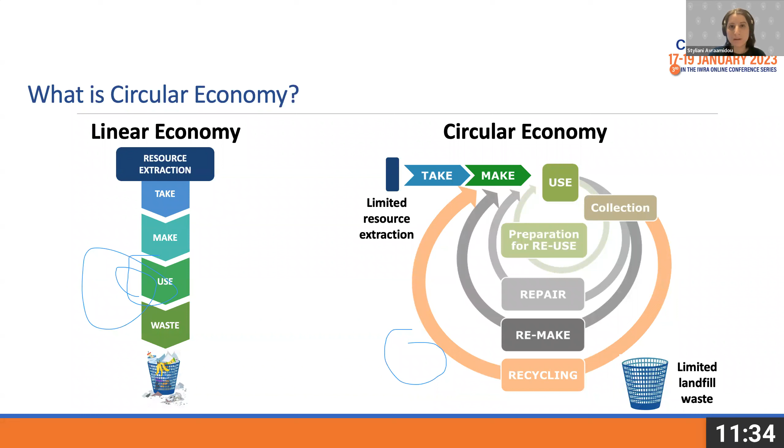So how do we define circular economy? Many people and many organizations have defined it. This paper from 2017 analyzed 114 different definitions of circular economy, which is supposed to be this well-defined thing that we know the meaning of and how to implement, but the reality is that we don't have a consensus of what it actually is.

Looking at all these definitions, we can identify 5 main key points: reduce material losses, reduce the use of natural resources, increase the use of renewable resources and energy, reduce our emissions, and increase the value and durability of products.

This concept of circular economy has been promoted throughout the world. Many businesses, organizations, and governments are promoting this concept. And the reason why this is in everyone's language is next slide.

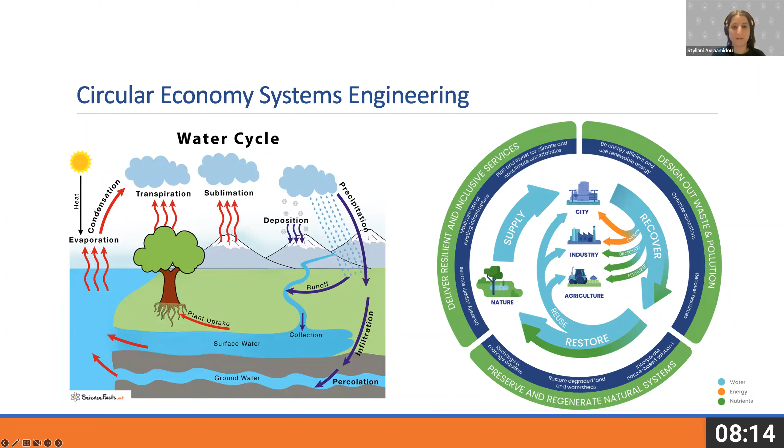These studies looking at the energy-water nexus are very important, and a systems analysis is very important when considering decision-making for circular economy water supply chains.

So I will briefly introduce you to a framework that we have been working on in my group, looking at how to systematically consider these huge supply chains. We had been looking mainly at food supply chains, so I will use again this coffee example to go through the framework, and we have been using mathematical modeling and optimization to achieve our systems analysis. I will go over each of these steps.

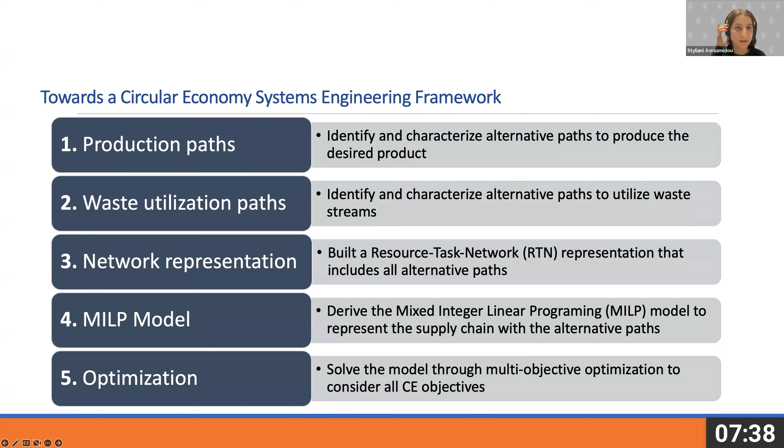Okay, so the first step is to consider all the alternative production pathways for our main product. In the case of coffee, we have two main production pathways, the wet method and the dry method. I won't go into too much detail, but the wet method uses a lot of energy and water, versus the dry method needing a lot of time and space. So we already have some trade-offs there.

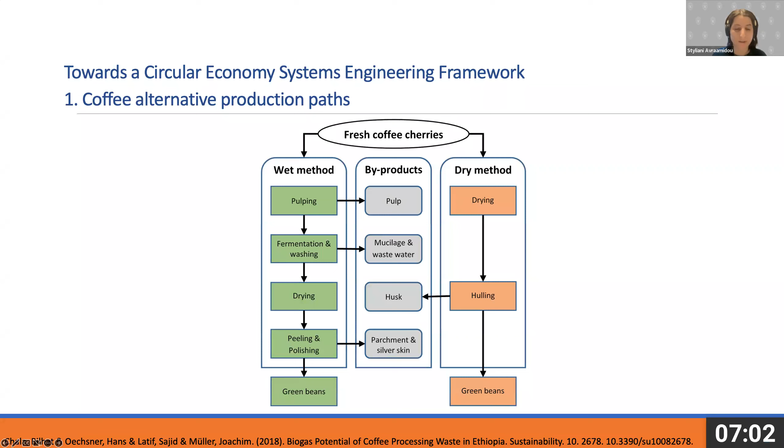So the next step is to collect all the different waste happening in our supply chain and figure out different ways to utilize those wastes. For the organic waste from our coffee supply chain, we can use them for many different products and processes. For this case study, we just focused on the energy producing utilization pathways.

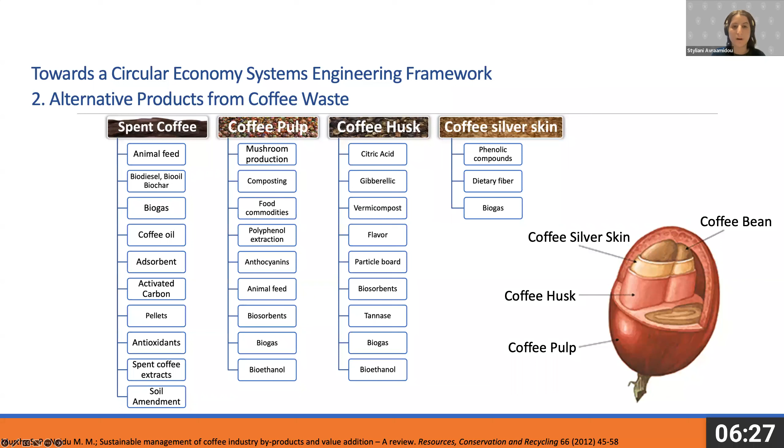So we identified those energy producing pathways. We did some research and found data and parameters for producing biodiesel, bioethanol, biogas, and all the energy products from our coffee waste streams. Based on this experimental data from all these papers, we were able to create models for each of the processes that I have here.

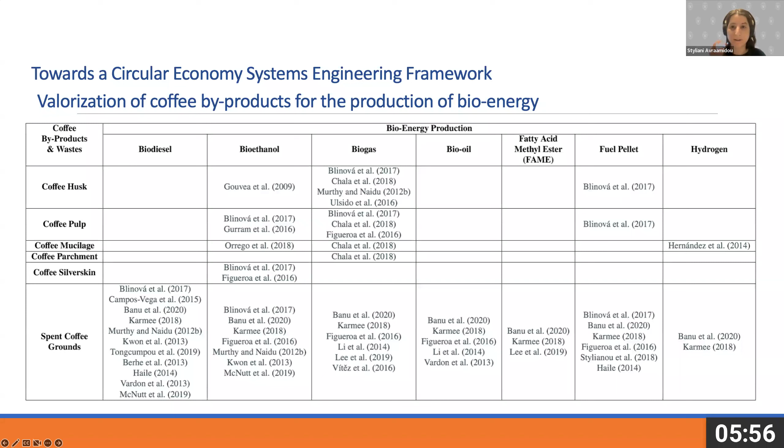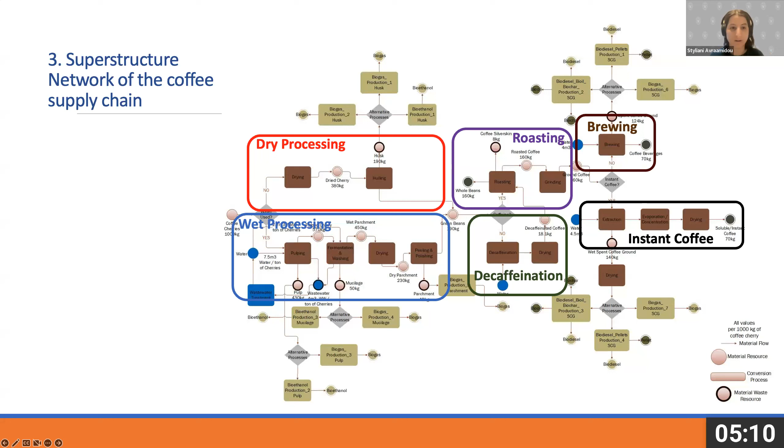Okay, so based on all this data that we collected about the production processing pathways and the alternative pathways to reuse waste and produce energy, we developed this diagram. This is called an RTN network, where each of the boxes is another process, each of the circles is a resource, the brown boxes are the main processing pathways, the greenish boxes are the waste processing pathways, and then we have a blue box for the water recycling that we need in the wet processing, as an alternative option if we want to reduce the water needed.

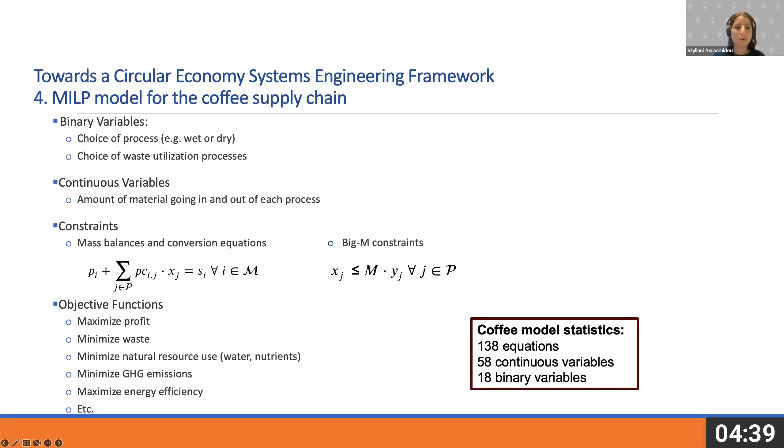Okay, so based on this network, we were able to develop a mathematical optimization problem, and that's what we are known for, creating these big models, where we had different types of variables describing what's happening in the network. We had constraints, and different objective functions. So we use this model to maximize our profit, minimize the waste, minimize our natural resources, looking at water or nutrients, minimize our greenhouse gas emissions, and maximize the energy output of our whole system.

So this is kind of the results that we get from this type of analysis. These are called the Pareto fronts, where we can see different solutions for our entire supply chain.

Here we had 5 different demand scenarios based on what type of coffee we want our system to be producing. We had whole beans, coffee beverages, and instant coffee. We saw that instant coffee was the worst. You can see scenario 4, which is only producing instant coffee, is utilizing the biggest amount of both water and coffee cherries. And then the size of the bubble is the CO2 emissions, so we see that scenario is also the worst. But this kind of analysis can give us different solutions, different options, and help us accelerate that transition towards circular economy.

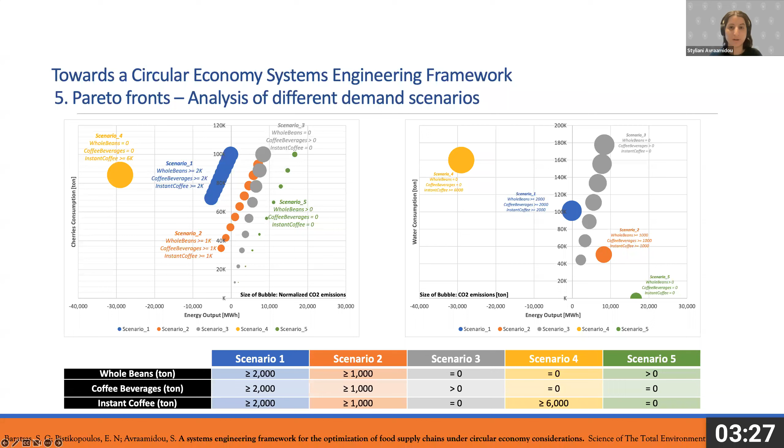Okay, so another thing is how do we navigate between all those points that I showed in the plot, like which one is more circular? And what we try to do is come up with some assessment metric to measure this circularity.

So we're thinking, do we just implement environmental goals? Do we just consider economic, social? How do we put all of this together into a single objective function? So what we came up with is to use those 5 characteristics that we identified for circular economy and come up with a score for each of those 5 categories.

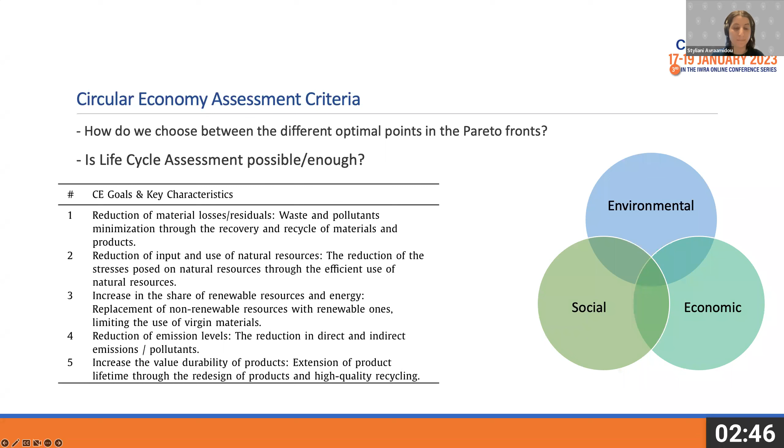So that's Micron, our circular economy assessment framework. This is for now focused on companies at the micro level. So we divided this into different economic sectors. We identify those principal categories from the key characteristics of circular economy, and we were able to use GRI-based metrics to come up with a metric on how well a company is doing in terms of water, energy, emissions, waste, and durability of their products.

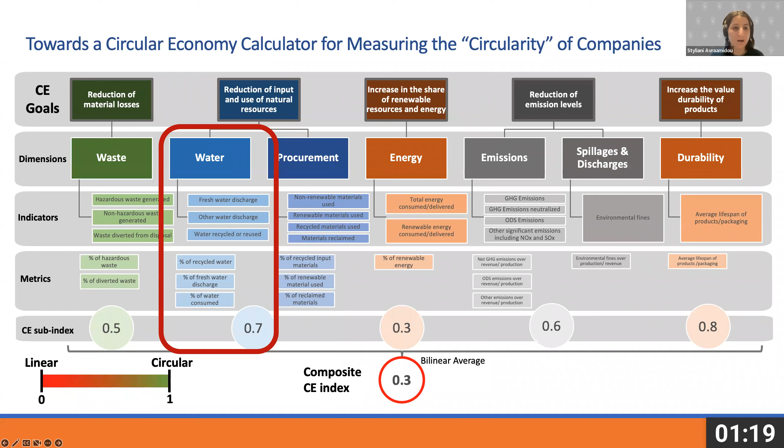So that's a bit more into what's going on in our Micron calculator. We have the 5 circular economy goals. For each one of those 5 goals, we have a dimension, and you see that we clearly have one specific dimension for water, because we really think that's something important in terms of circular economies in general, not just food circular economies. And then we have indicators, metrics, and we give a score from 0 to 1 for each of those goals, and then we average those to get a composite circular economy index. If you're closer to 0, you're linear. If you're at 1, you're ideally circular.

And that's just a summary. What we use this metric for is for companies to be able to track their transition towards circular economy, so it can be a temporal tool. We can identify which areas really need improvement, and we can compare companies at the same sector with other companies at the same sector.

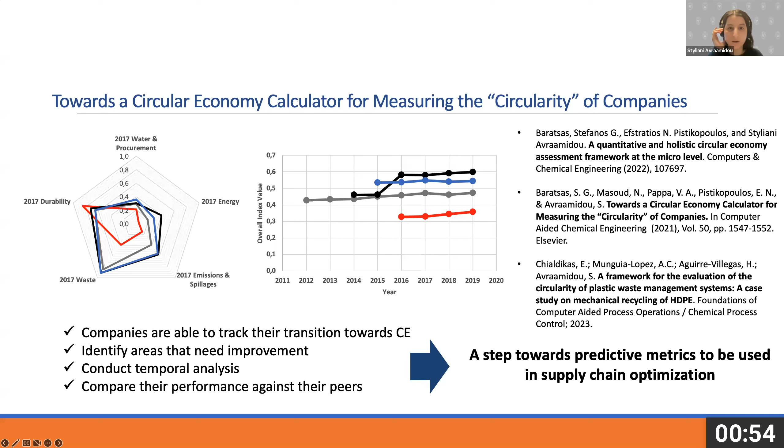Next slide. Okay, just to summarize everything, I presented a framework for the modeling and optimization of circular economy supply chains, and I also introduced a circular economy assessment tool. I think systems analysis can aid in the understanding, analysis, and optimization of more general circular economy supply chains and help us converge all these different disciplines towards our common vision of circular economy.

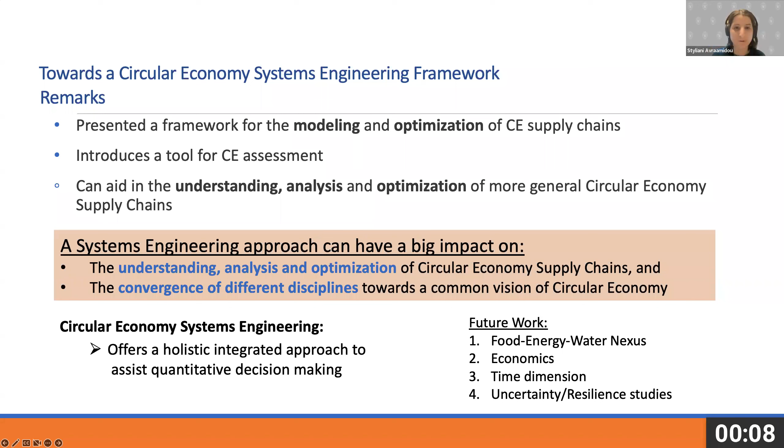Future work will be to consider more of these food, energy, water nexus interactions, looking at more of the economics, the time dimensions, and the uncertainty that comes into the supply chain. I'm sure that many of the speakers will be able to tell us more about these water supply chains in a bit. Next slide.

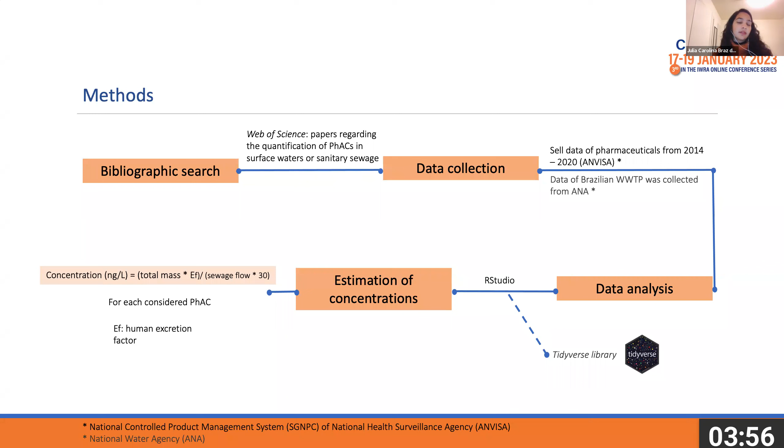So I did the estimation considering the total mass of active compounds sold, the human excretion factor of each of the active compounds, the sewage flow expected for the municipalities I'm working in, and a conversion factor.

So I noted that in Brazil, the active compounds in sanitary sewage are mostly reported in São Paulo state, in those cities, Minas Gerais state, Rio Grande do Sul, and Ceará state. And it makes sense because especially São Paulo state and Minas Gerais state are the most populated states from the country.

The most investigated therapeutic classes are antibiotics and psychiatric drugs, and also the data collected from the national agency focuses on these kinds of therapeutic classes.

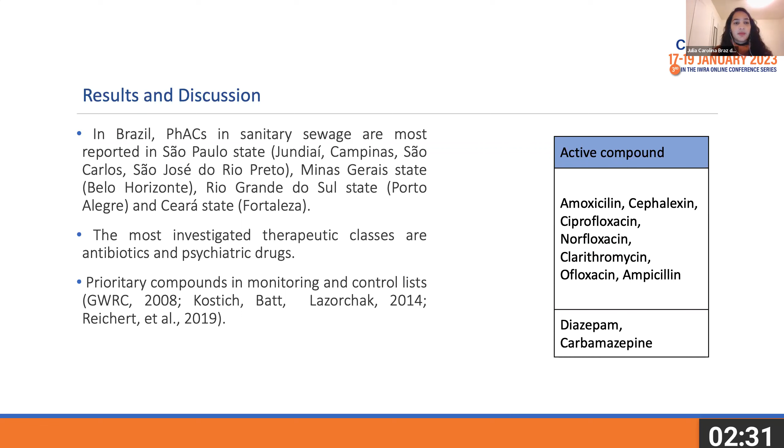So in this first data exploration, I noted that amoxicillin and azithromycin, both antibiotics, are the most recurrent in the registers.

And on the basis of the sold quantity—units quantity, it may be a box with many pills, or it may be a bottle with a certain value of liquid active compound—amoxicillin and azithromycin are still the most sold, but we can see that amoxicillin has a human excretion factor of 60%, while azithromycin has about 10%.

And we have the other active compounds like diazepam and carbamazepine.

So here I brought just amoxicillin and azithromycin because they are the most sold based on quantity of units sold. And as you can see yearly,

both of them have the highest concentrations compared to the other active compounds. Amoxicillin is about more than 75,000 nanograms per liter, based on my calculations, and it makes sense because it is one of the most sold, and it has also the highest value of human excretion factor.

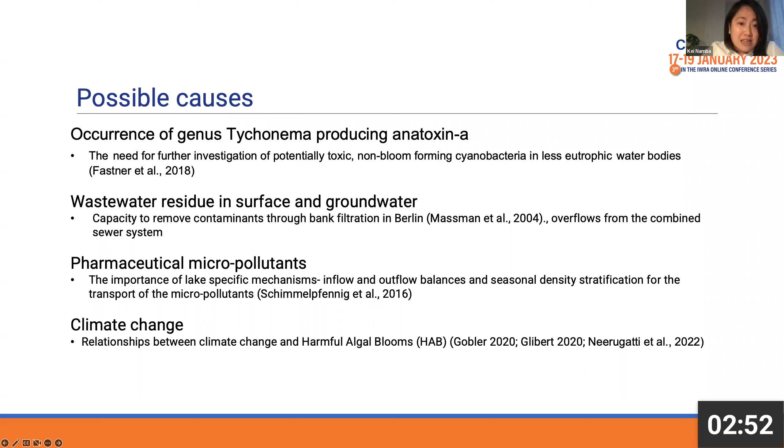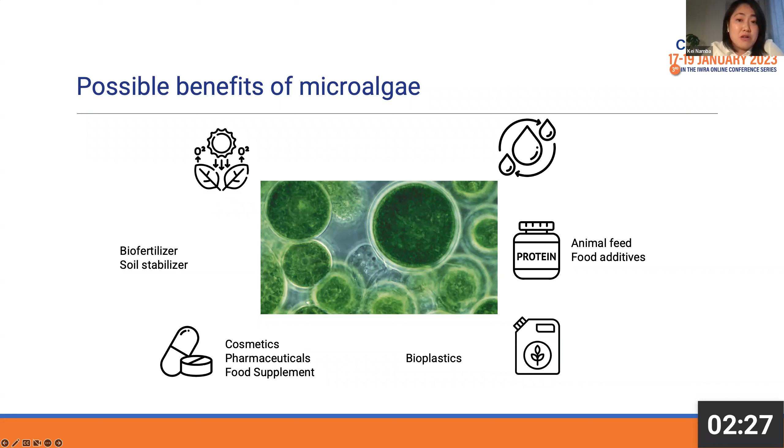However, if treated properly, cyanobacteria or microalgae can be used for many good purposes: they reduce carbon dioxide, phosphorus, and nitrogen in freshwater ecosystems, and promote biodiversity. They can be used as a sustainable source of nutrients and food additives, or as biofertilizer, soil stabilizer, bioplastics, or biofuel.

For the solution, we will remove the toxin and treat it in the most energy efficient way, and investigate what kind of materials we can extract as a result of the treatment. We want to sell this solution as a service. Here are the potential materials we can get as byproducts. Through our lab process, we produce resources out of these algae and cyanobacteria, and it also captures CO2, and the water will be reused over and over again.

And can you go back to the previous slide?

The further byproduct of toxin removal, biofertilizer, is especially attractive because there's a global shortage of phosphorus, and producing fertilizer locally is urgent to build a self-reliant system. There's a demand for shifting to locally produced fertilizer.

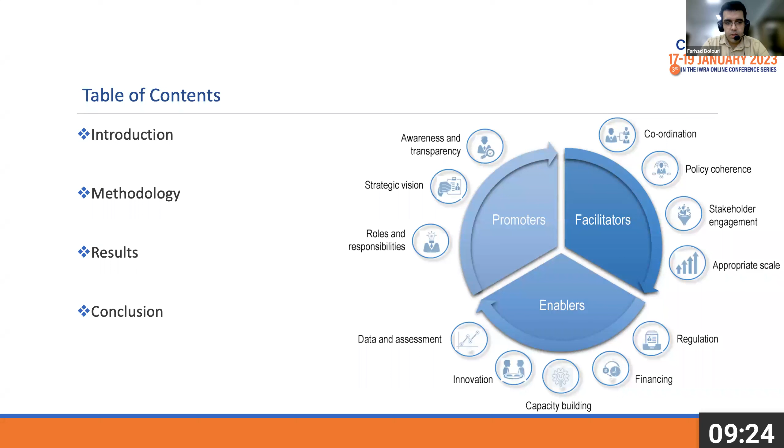Next slide, please. As you see in the table of contents, we have introduction, methodology, our results and discussion, and conclusion.

As introduction, as you know, emerging pollutants are chemical compounds identified as dangerous to the environment, and consequently to human health. Presently, they have been labeled emerging because of the rising level of concern linked to them.

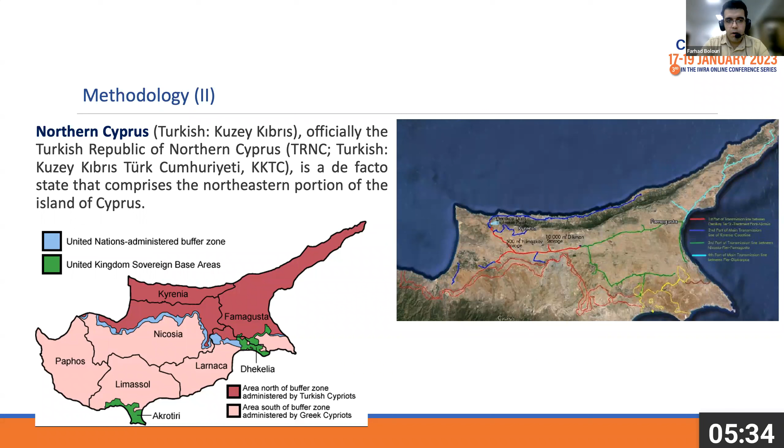Our case study is North Cyprus — in Turkish, Kuzey Kıbrıs. Officially, it is the Turkish Republic of North Cyprus, TRNC. In the photo, you see Cyprus is in two parts, north and south, with a region that is the United Nations buffer zone. Next slide, please.

Yes, up here I want to show the results. For example, the United States has USGS. They defined what is the emerging concern, emerging pollutants, and they said it is important to take the data. The most important part of this research and solution is data. I read from their report.

They said emerging contaminants or contaminants of emerging concern can refer to many different kinds of chemicals, including medicine, personal care, or household cleaning products, lawn care, and agriculture products, among others. These chemicals make it into our nation's lakes and rivers and have a detrimental effect on fish and other aquatic species. It is also not good for human health, as you know.

So you see, they don't have any special solution for it. But in the first step, they said the data is very important to gain. Because this issue is very new for all societies, they highlighted getting and gaining more data for this problem. Next slide, please.

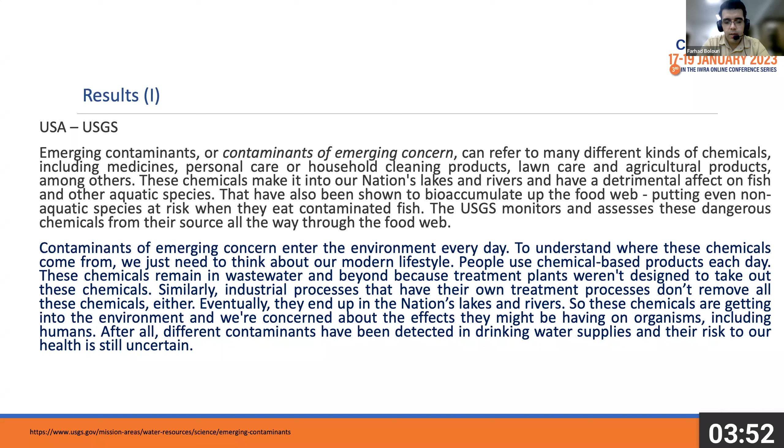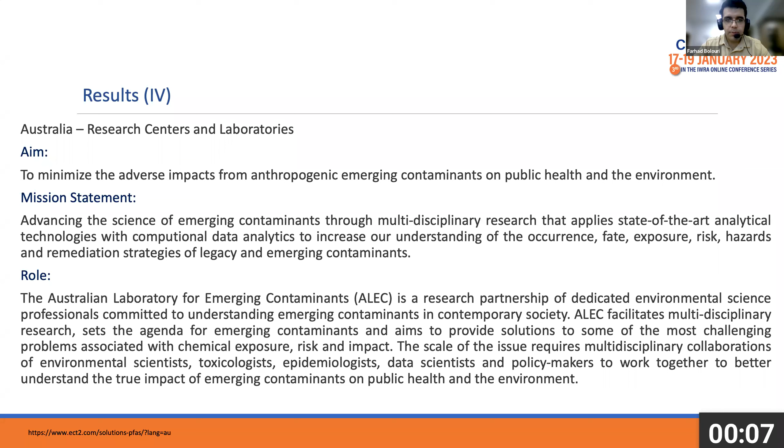Next slide, please. Yes, according to these countries that we mentioned, and according to a review of the management status of developed countries regarding emerging pollutants, it can be concluded that due to the status of identifying these pollutants and the importance of valuable data on these items to make decisions about how to manage them, it is essential to address this issue in Cyprus as well.

And to collect emerging pollutants data in the entire region carefully for consecutive years. Even data exchange with the south part of Cyprus can be proposed, to collect data for all of Cyprus as a whole, so that all correct management decisions are applied. Also, according to the circular economy approach, it is very important that during the decision-making process for the management of emerging pollutants, the nature of circular economy is also considered.

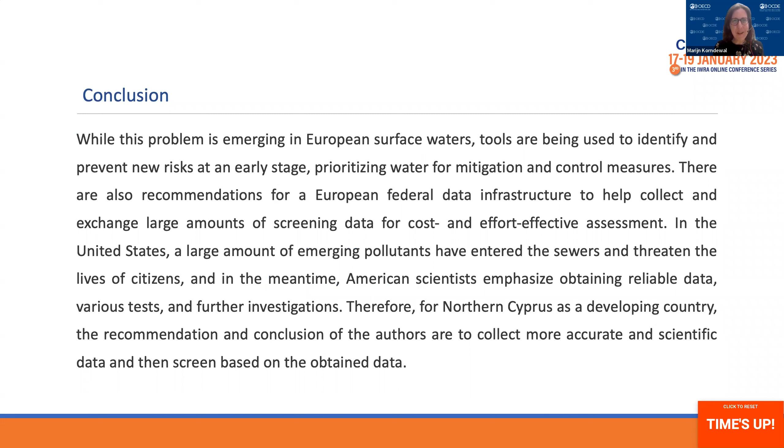For example, emerging pollutants are used in the manufacture of related products in order to cause less damage to the environment, exactly what is done in the case of car batteries, some computer parts, etc. Next slide please. Yes -- Farhad, sorry, I'm afraid I'll have to interrupt because your time is up. Can you do your conclusion in one sentence? Okay, the conclusion is the same, thank you, our last slide. Okay, so next slide, please.

Thank you so much for your attention.

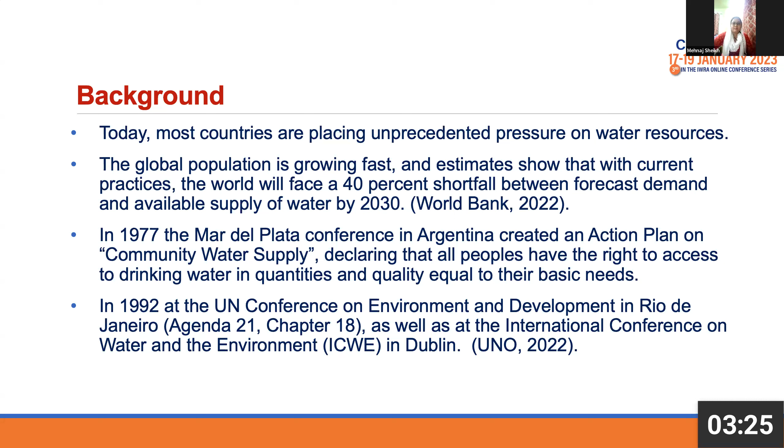Many national and international organizations are working towards these water-related issues. The UNO's Sustainable Development Goals also address the issue of water.

Indian cities are also facing many major water crises, like the supply of water and the quality of water. Since India is the second most populous country in the world, demand is increasing, and unsustainable use has degraded its quality. So in the same line, we have chosen...

We have chosen Jaipur, the capital city of Rajasthan, as the study area where we can study the demand of water and its impact on the health of Jaipur. Rajasthan is a water deficit zone, and so is Jaipur. Being an urbanized city, the population is increasing rapidly, along with manufacturing industries, which have all increased the demand on water, and its supply and quality are degrading day by day.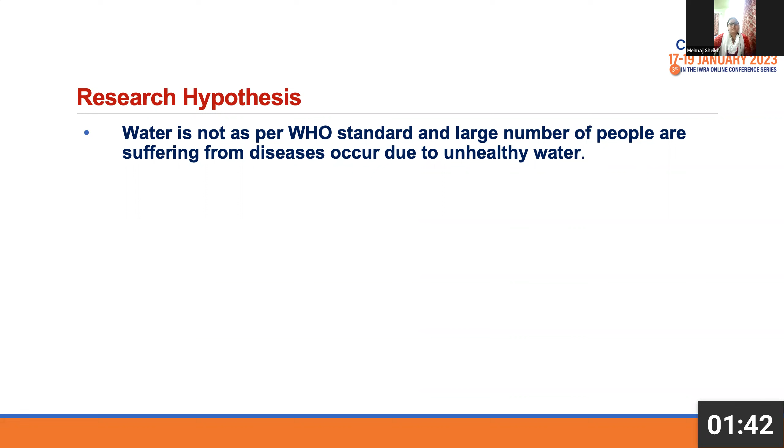The research hypothesis is whether the water is not as per WHO standards, and due to this, people are suffering diseases due to unhealthy water.

The methodology adopted here includes personal observations and field surveys. We have also collected data from government reports, like from the Public Work Department and municipal corporations. So the data reveals that...

The sample study shows that Jaipur receives nearly 65% contaminated water, which is high in concentration of TDS, and contaminated by bacteria.

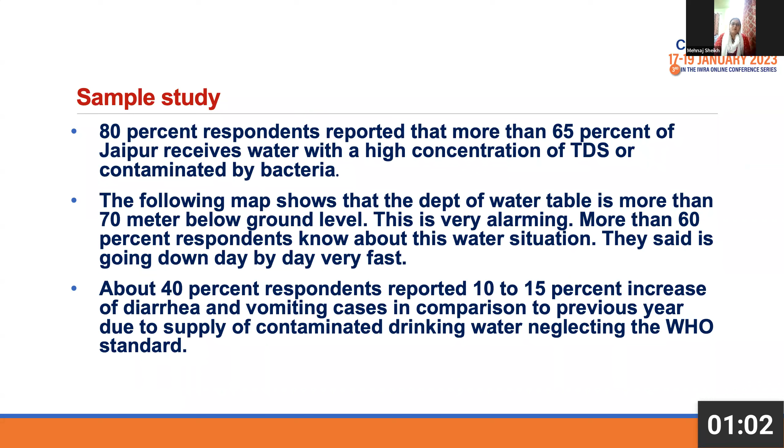This map shows that the water table or groundwater table is rapidly going down, and it is below 70 meters below the ground level.

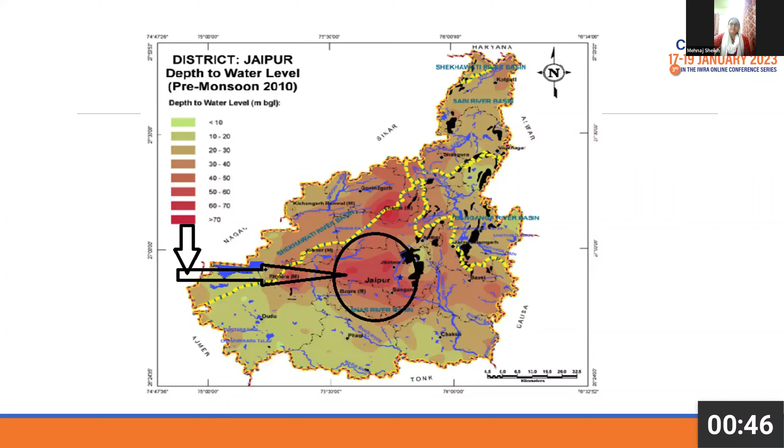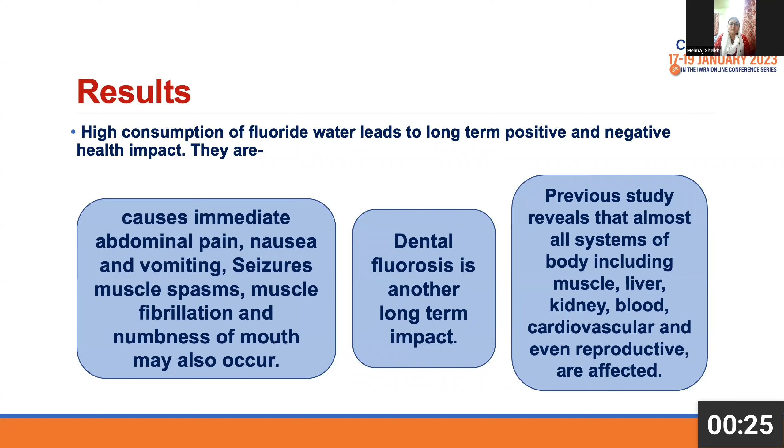The results show that some zones and areas of Jaipur are consuming high water that is rich in fluoride. This has led to many negative impacts on health, like abdominal pain, nausea and vomiting, dental fluorosis, and it has affected almost all body parts of humans.

The next contaminant is nitrate. Due to excess use of nitrogenous fertilizer and organic waste, the nitrate concentration in water is increasing, which has led to very unsafe conditions in infants like blue baby syndrome. This has also led to increased colon cancer and many respiratory diseases.

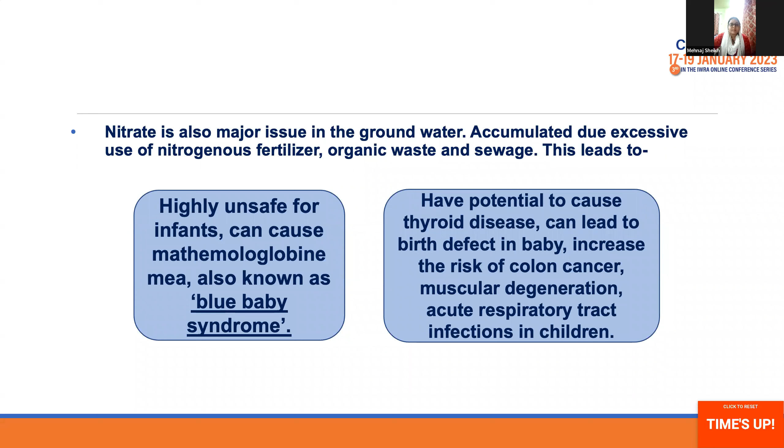So we can conclude that to tackle all these problems, it is demanding that proper rainwater harvesting systems and groundwater recharge systems should be enforced effectively. Ensuring safe and regular water as per WHO standards is also mandatory.

Policy implications: as a last point, I would like to conclude that some steps must be taken in order to save the environment. Effective steps must be taken, and this should rely on public participation and should be dependent on us.

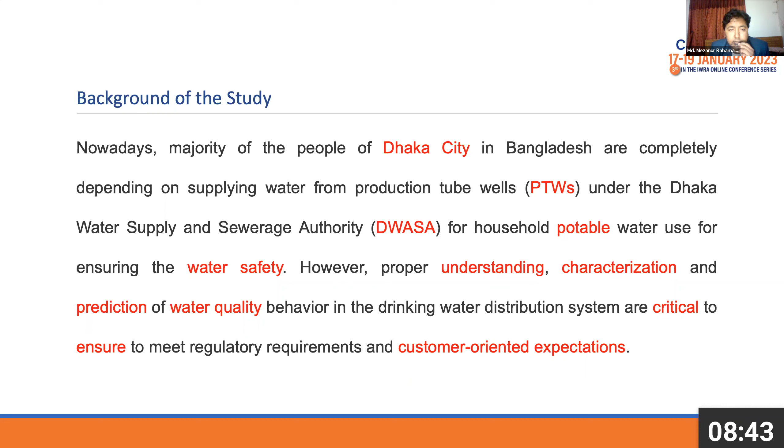The main objective of my study is to assess the effectiveness of the current chlorination system in the water distribution system of Dhaka city, and then prediction of the concentration of residual chlorine over space and time. The residual chlorine is an important disinfectant to make water safe before drinking. Also included is the calibration and validation of the hydraulic model using time pattern.

This was done through the EPANET software. EPANET is an Environmental Protection Agency tool, a software for hydraulic and water quality modeling, and also for determination of sensitivity of the residual chlorine model.

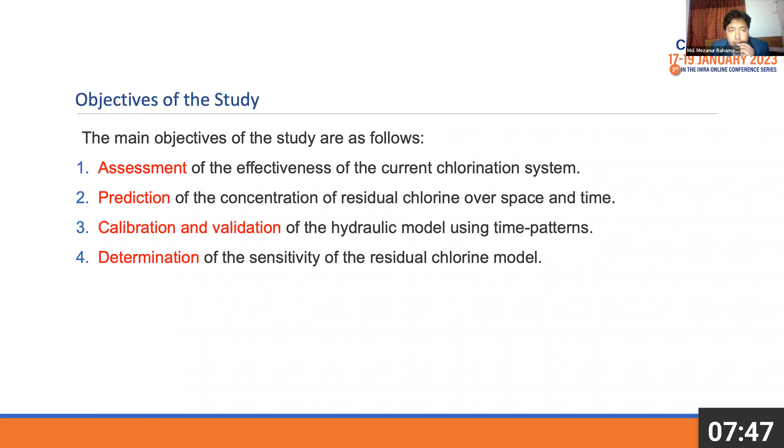The main issues and problems of the study area are that there are 100 DMAs, meaning district metered areas, to improve the water supply network of Dhaka city. Though there is a protocol for chlorination at the pump or pump station of production tube wells, monitoring of residual chlorine is found absent in reality. Chlorine is administered rather arbitrarily, and its effectiveness in the water distribution system remains largely unknown. The concentration of residual chlorine within a water distribution network varies in accordance with variation both in location and time.

The methodology of the study: first, I had to select a DMA, district metered area, which is an existing hydraulic distribution network. I set this up through the GIS database and EPANET.

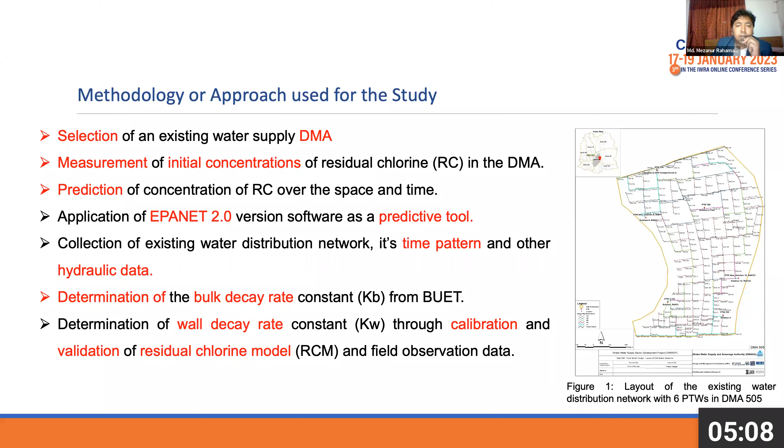The average value of KB, the bulk decay rate, was found to be negative 0.2975 per hour, and the value of the wall decay rate was 0.0065 feet per second. We calibrated at 2 points, comparing predicted and observed time series values of residual chlorine for node 172, and found that KB of 0.2975 and KW of 0.0065 fit well with the observed residual chlorine data. So we took KB equal to 0.2975 and KW equal to 0.0065 feet per second.

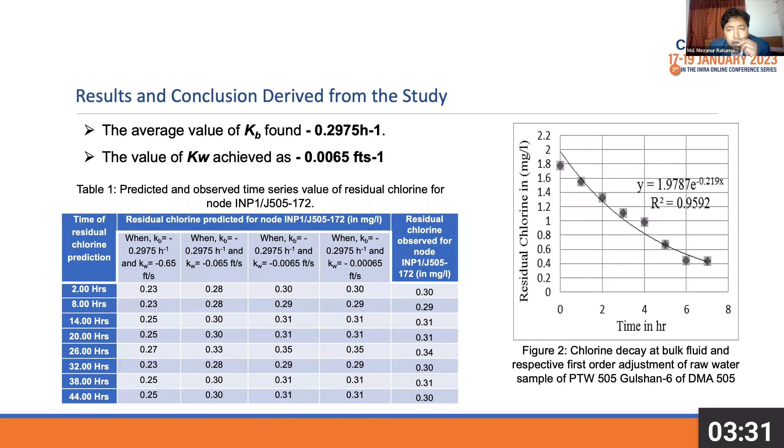Then accordingly, we simulated the model and matched it with the observed residual chlorine data, and finally we got some results.

From the study, we found that the value of KB is significantly higher than the literature value due to high temperature and high organic content. The KW was nearly similar to literature data. We also found that more than 50% of pipes had zero residual chlorine at baseline condition, but when we improved the injection of residual chlorine, the coverage in the network showed better results than the baseline.

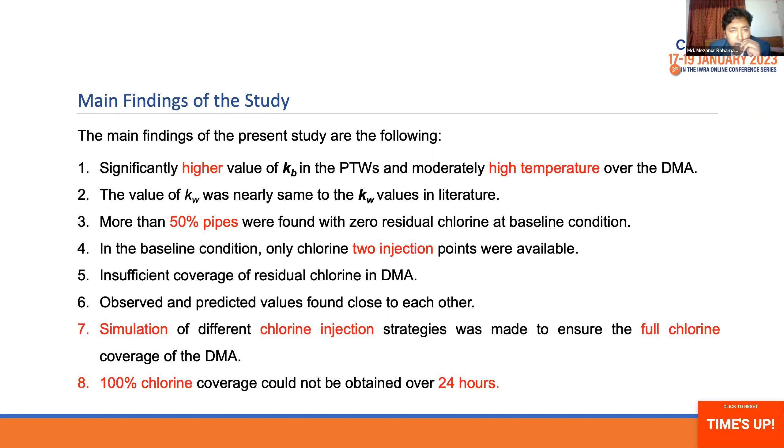I was going to invite you to make a conclusion in one sentence. Okay, thank you, ma'am. Thank you all. If any question, I will like to answer.

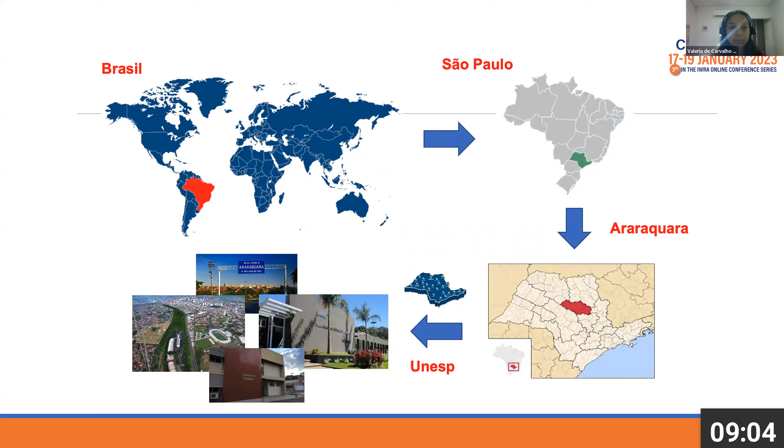To give you a look at my university, we are in Brazil, in the state of São Paulo, in the city of Araraquara, at São Paulo State University, in the Department of Engineering of Bioprocess and Biotechnology. I'm going to talk a little bit about colorants, the main subject of my work. The industry has taken actions to color different kinds of products, improving consumer acceptance.

My research group works with colorants. The industry has taken actions to color different types of products to improve consumer acceptance, and thus product sales. Colorants can be found in different places, involved in the process of storage, processing, packing, distribution, or used to preserve some characteristics of the product. For example, in food applications, colorants can protect the flavor and vitamins from photodegradation.

The colorant market is growing day by day and is expected to achieve around 68 billion in 2023, growing around 5.4% between the years 2016 and 2023. This market is composed of synthetic artificial colorants.

We have nature-identical colorants and natural colorants. We know that synthetic colorants are the most used. However, there are problems not only during the process to obtain these colorants, but also after the process. For example, in the textile industry, there are several problems with the discard of these synthetic colorants into water, and this is a big problem that natural colorants can be used to replace the synthetic colorants.

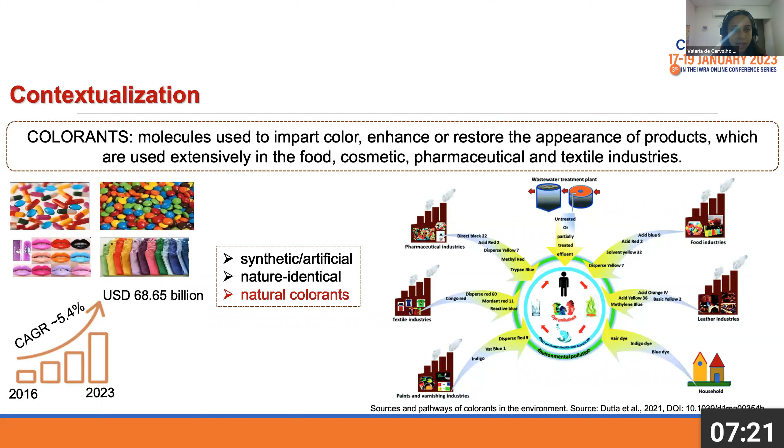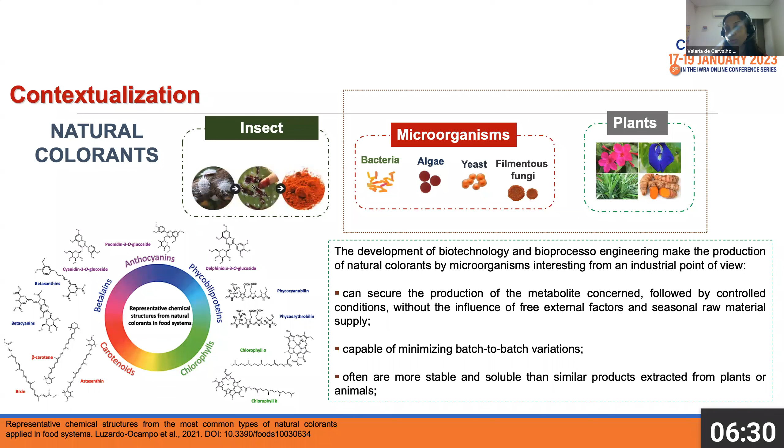Natural colorants are composed of compounds synthesized by insects, microorganisms, and plants, with a diverse chemical structure produced by these organisms. However, with the development of bioprocess and biotechnology, production by microorganisms has been increasing day by day, and this is important because we can secure the production without several problems, for example, with raw material supply. We can improve the production by studying the batch, and we find less variation between one production and the other. Generally, natural colorants produced by microorganisms are more stable than those produced by plants, for example.

In this way, the goal of this study was to produce red colorants by the filamentous fungi Talaromyces amestolkiae in a stirred-tank bioreactor, and to estimate the environmental impacts of this process using life cycle assessment.

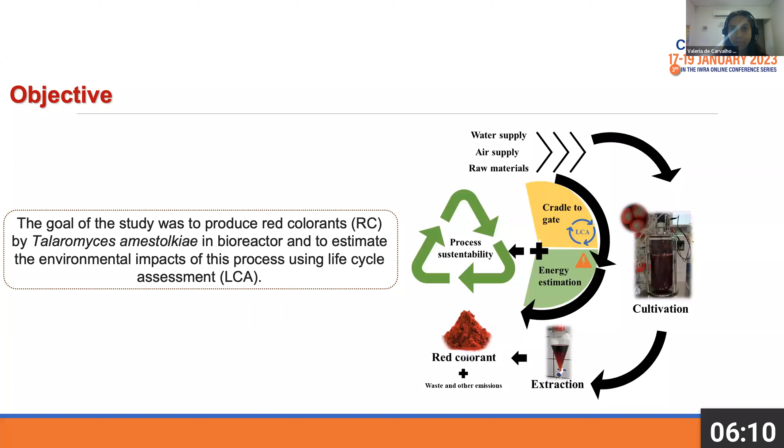So the bioprocess to obtain this colorant was composed of 3 steps. The first one is the production, which is shared in the pre-inoculum, the inoculum, and the cultivation that occurred in a stirred tank bioreactor of 4 liters. After, there is separation between the biomass and the liquid containing the colorant, and this liquid is submitted to extraction steps using liquid extraction with organic solvents.

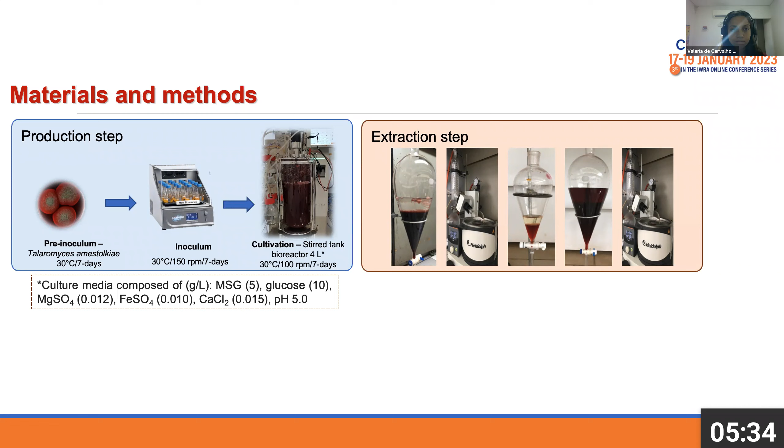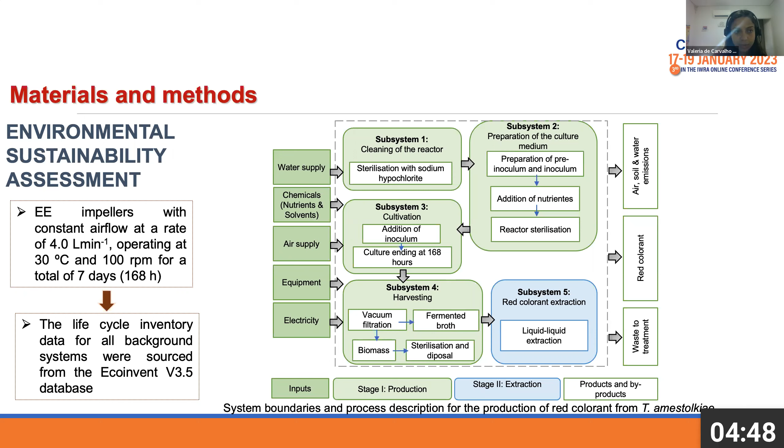So the first part of the study was the production, and we analyzed 2 impellers to produce the colorants. The first one was Rushton turbine, and the second, elephant ears impellers. We had a difference in the hyphal pellets formation when using one kind versus the other. This is quite interesting because although the biomass is not the subject of this work, this biomass can be used for other purposes, for example to produce biogas.

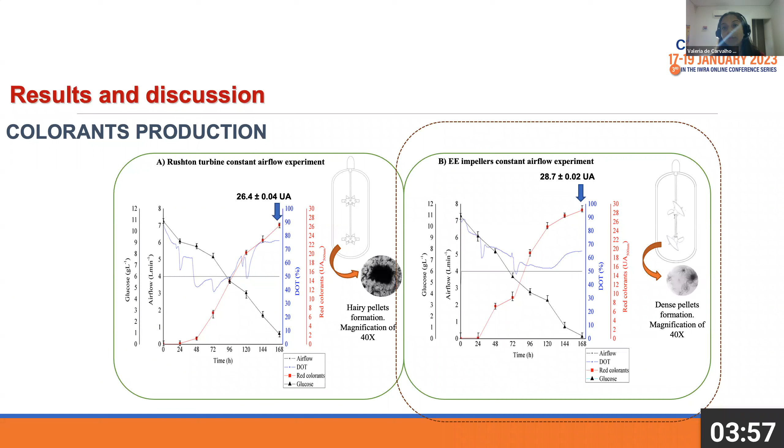And so the dense pellet formation was interesting for this application. Considering the growth of the microorganism and the production, which was higher using elephant ears impellers, this was the condition used for the life cycle analysis.

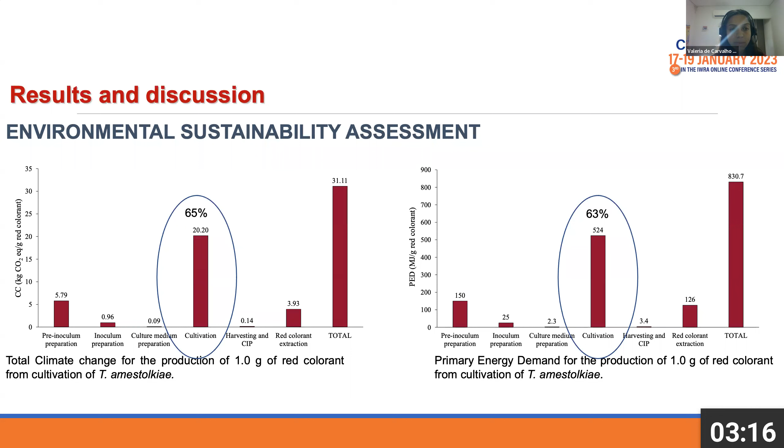So when we analyzed the environmental sustainability assessment for the production of this colorant, we made first 2 analyses: the total climate change, and the primary energy demand. However, for both analyses, the main problem was the cultivation step. This was around 65% of the total climate change impact, followed by the pre-inoculum preparation. And for the primary energy demand, it was 63%, followed by pre-inoculum preparation.

When we analyzed other impacts, we also saw that the cultivation step was the main problem. Why? Maybe because of the time needed for these steps, which was 168 hours for each one, and considering the electricity, this was the main problem. In Brazil we have hydroelectric electricity, and the energy demand is too high. And if you consider that you are using organic solvents in the extraction steps, these solvents can be replaced and reused in the process, used more than one time, so this was not a big problem for the process.

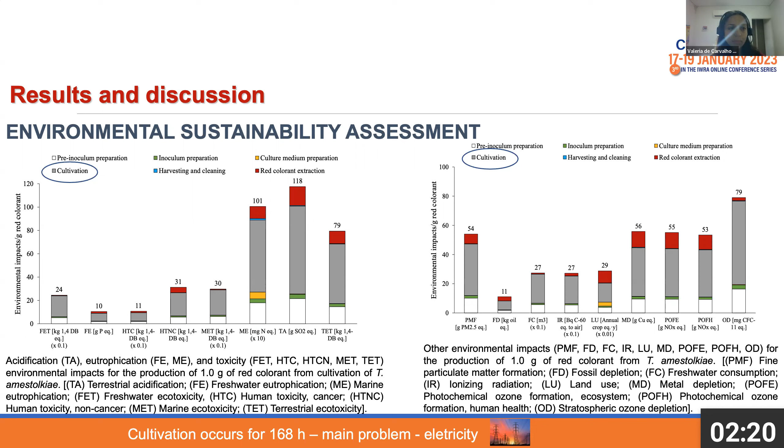So the environmental sustainability assessment indicates that the cultivation step is a major hotspot in the red colorant production by Talaromyces amestolkiae, mainly due to the process time and the associated energy requirements. Although this natural colorant has a big market and can be used in several places to replace synthetic colorants in order to reduce environmental problems, what we can do, since we have a problem with this process as well...

Future studies that we are doing now include, for example, making improvements in this process in order to reduce the time of the cultivation step, and second, using low carbon energy sources. In this way, we can reduce the problem related to electricity, for example.